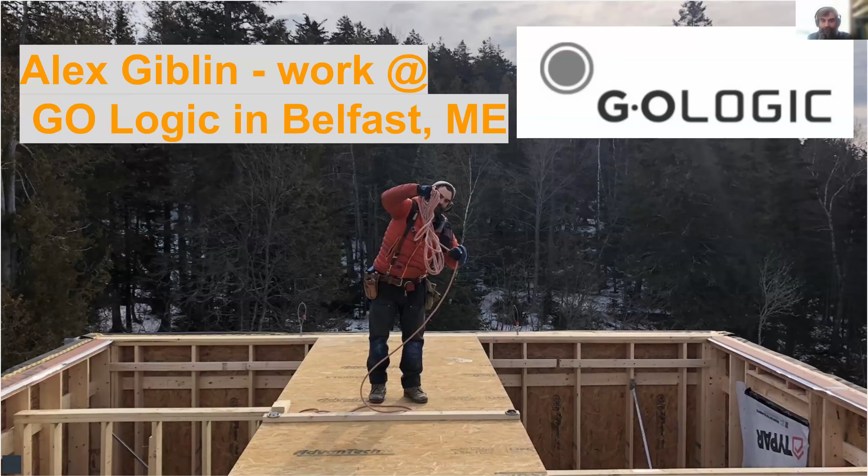I'm happy to be here today talking about DfMA, design for manufacturing and assembly. We also throw an L in there sometimes, logistics, as trucking is a key component to delivering offsite panelized construction projects. I'm going to start a little about me. I'm a carpenter, as mentioned, for a long time. I've been working at GO Logic for coming up on 4 years now. I spent the first 2 years out in the field.

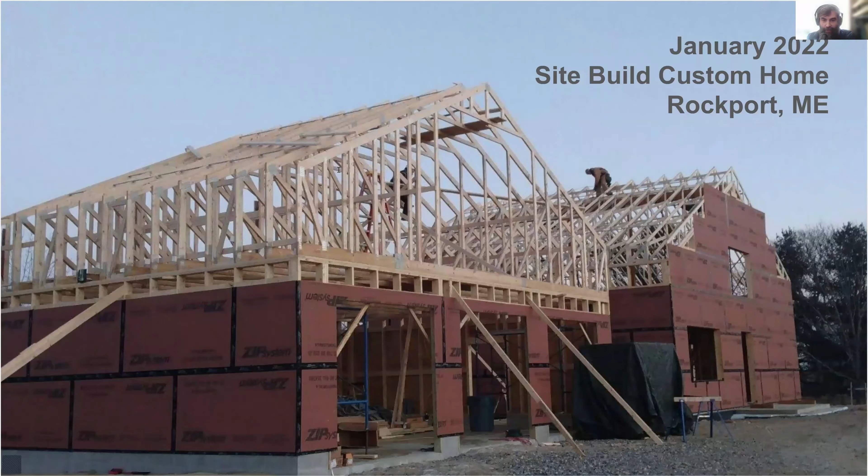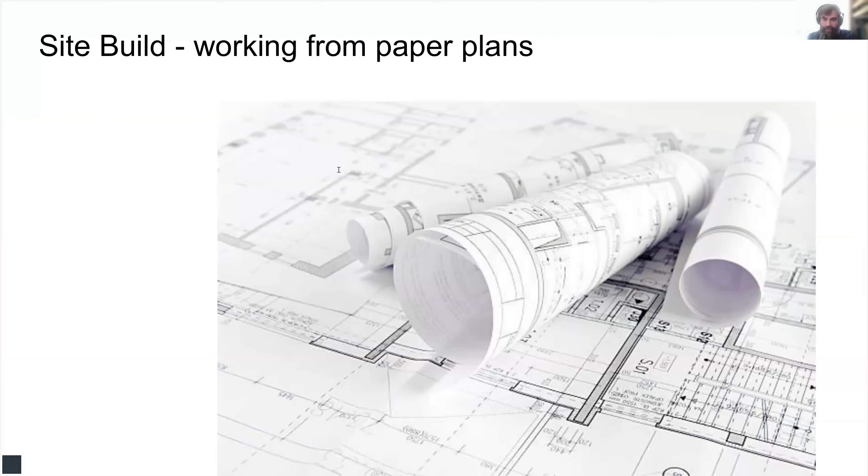So here's a couple years ago, me site building, my first build with GO Logic. I'm just going to talk a little bit about site build to set the stage for the comparison to fully modeling things in advance. Yeah, working cold outdoors. Here we are framing in January, setting trusses, windy, cold. And we're always working just from plans.

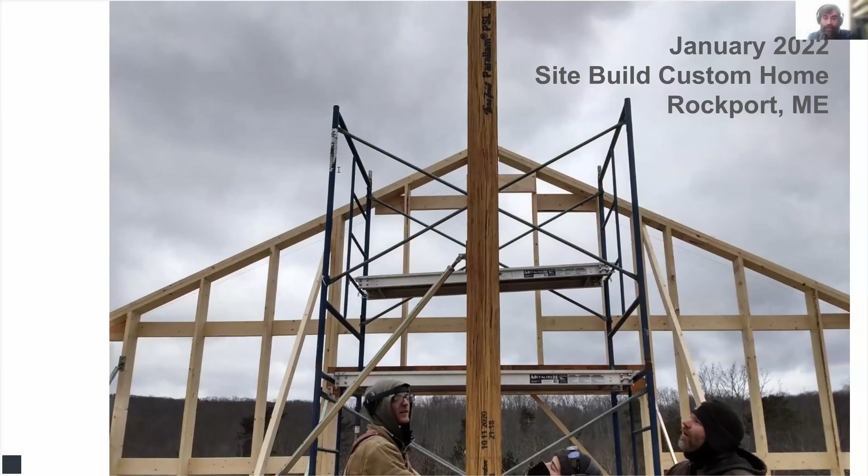This is kind of like proto DfMA for me. I always would make my own framing plans, and I would draw them out and figure out how to build things beforehand. A lot of times nobody could read them but me, but it was a good way to plan for my builds. I started doing some programming even years ago. This sort of evolved from the TI-89 calculator use in high school.

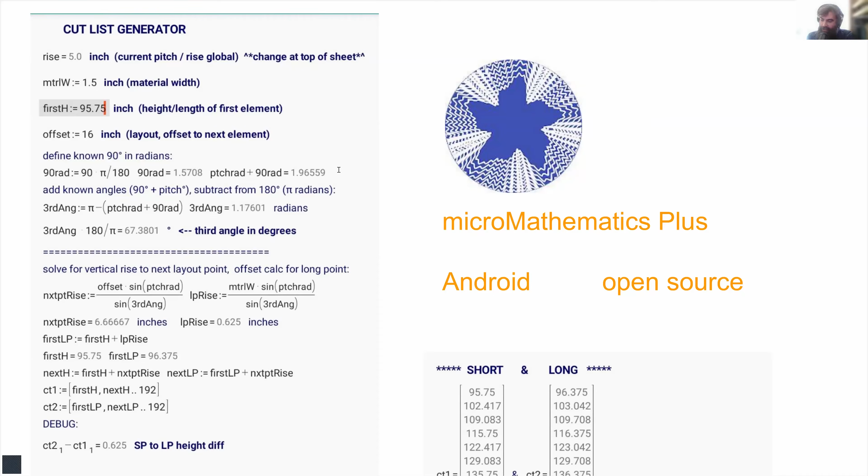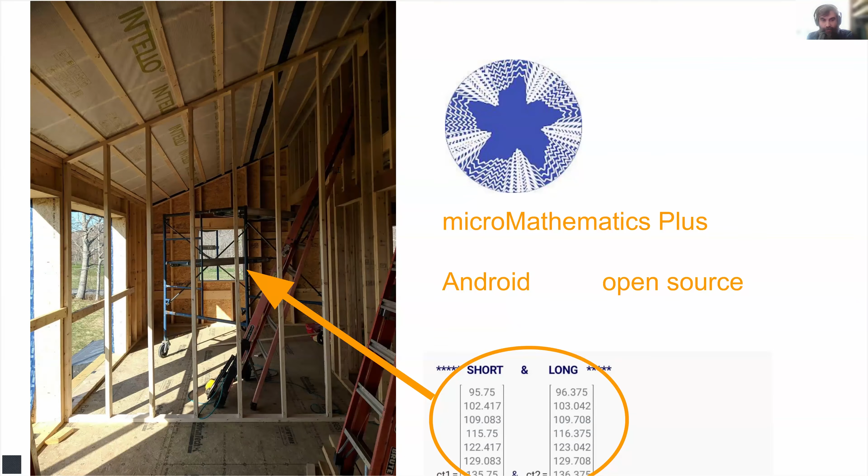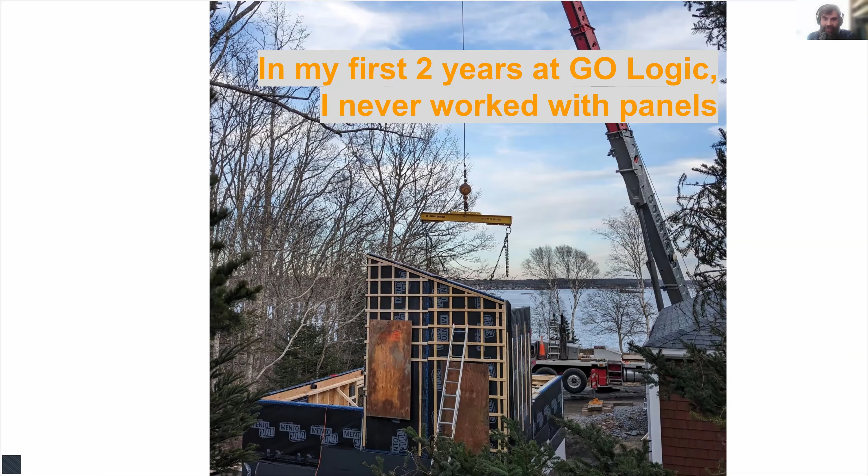So like making cut lists, I could generate things under a roof slope, studs, some framing. Again, I have the background, so I was well suited to be digging into CAD modeling and advancing these techniques. So I never built with panels in the first couple of years. I was really curious, how the heck was it done?

We have all these trailers. We're shipping buildings out of state, across state lines. We have overpasses, height requirements, and go all over New England. And there's our first parameter for constraint, right? Height and width. We have to ship these at a road legal height. We typically try to avoid oversized load designation, just to simplify on our end.

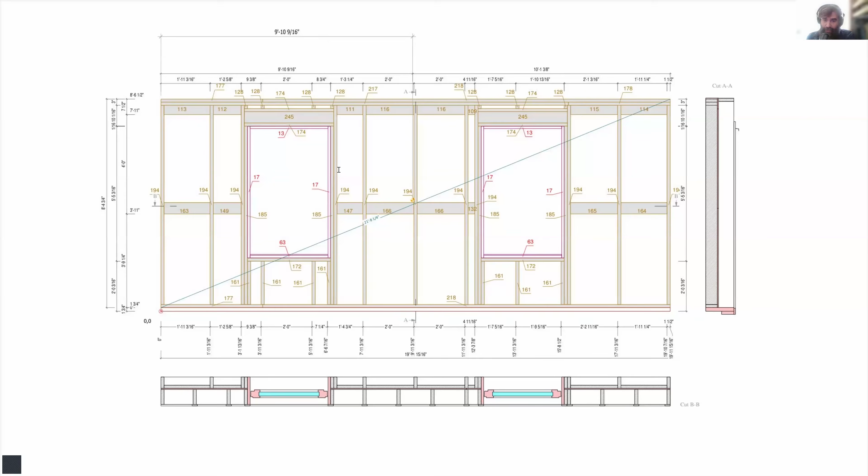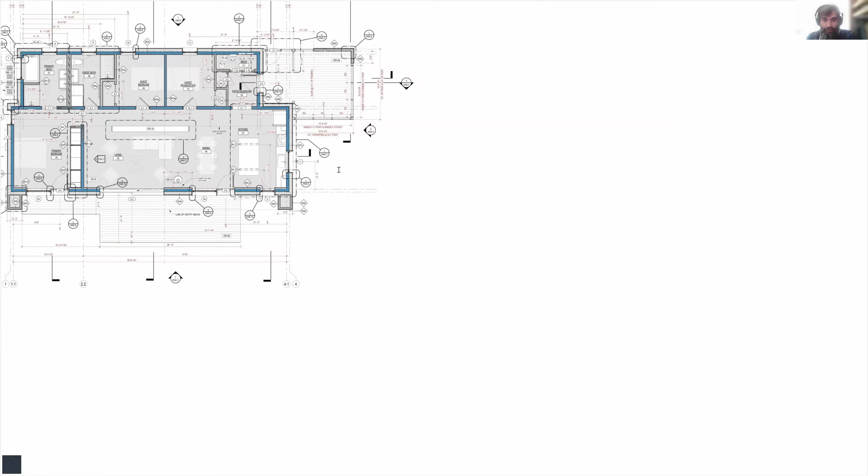So I was seeing these shop drawings that were made in the shop. Again, I was not familiar much with panelization. And we were working from the shop drawings, building panels on tables. And then there was this 3D model thing I kept seeing. I was very curious about it. How was this being done? How were we taking plans, like I was familiar with working with, and translating them to build in the shop? How was it done? I asked a lot of questions.

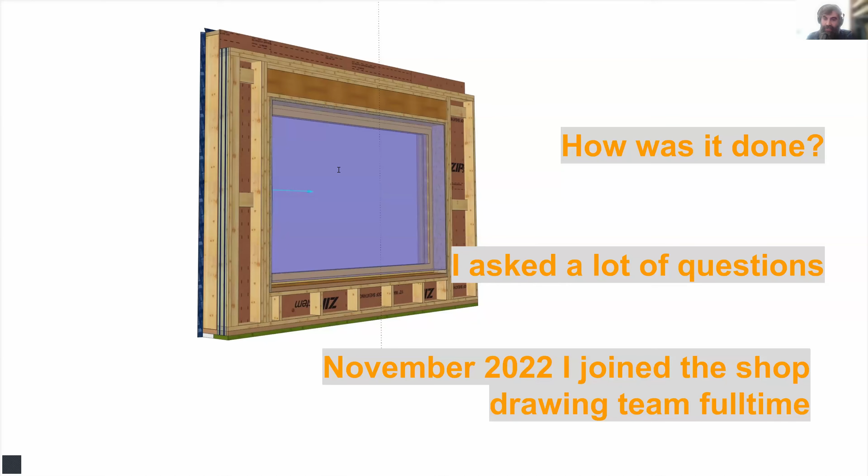The guy who is now retired, who had my job before me, was just a classic, a really good architectural technologist, been in the industry for 40 years. And he took me on as an apprentice a couple years ago after a lot of pestering. So here's what I inherited: his process, which worked well, but was not without complication, which I'll explain.

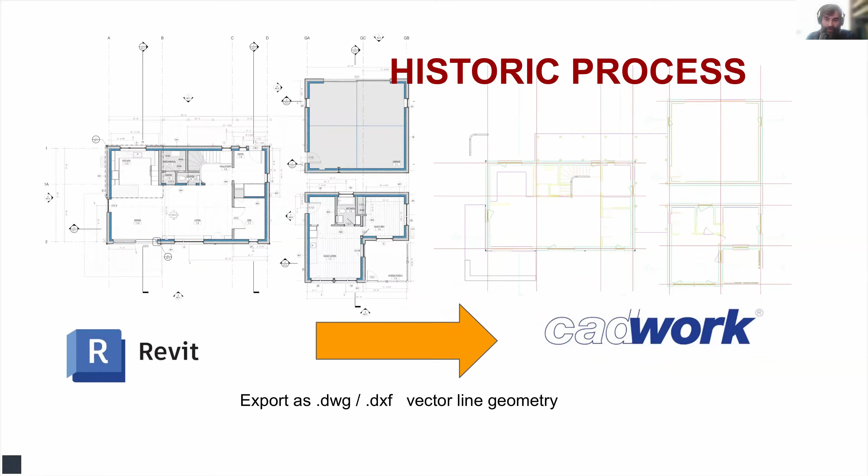We were taking the sections and exporting as DWG, DXF, vector art, and bringing them into the 3D program. We use a program called CADWork. It's a very powerful modeler, has parametric tools for discrete element framing geometry. It's a good, solid modeling program. So we bring in the successive plans, right, along the Z, and then we'd bring in all the sections, and we'd build this framework, this skeleton from the plans.

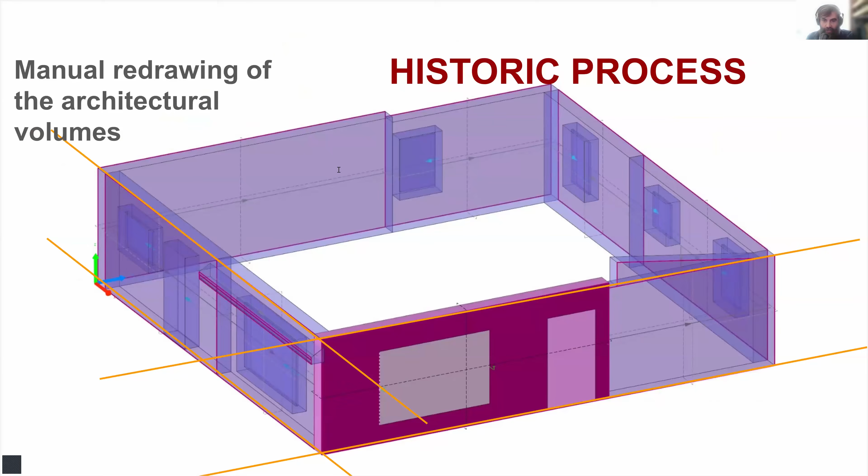And then we would create these rough volumes. And then from the rough volumes, we were able to generate walls. We're placing all the windows manually and things as per the plans and sections and elevations. And then we can parametrically generate all of the framing geometry, the entire assembly. So parametric generation, this is a really cool thing.

We use this tool called CADWork. It has its roots in Switzerland, I believe. I think it goes back to the early 80s and like watchmaking, just really technical drafting. But it's evolved for the timber industry and is used a lot in Europe and increasingly in North America. It has this thing called the element modules for parametric definitions of wall framing geometry.

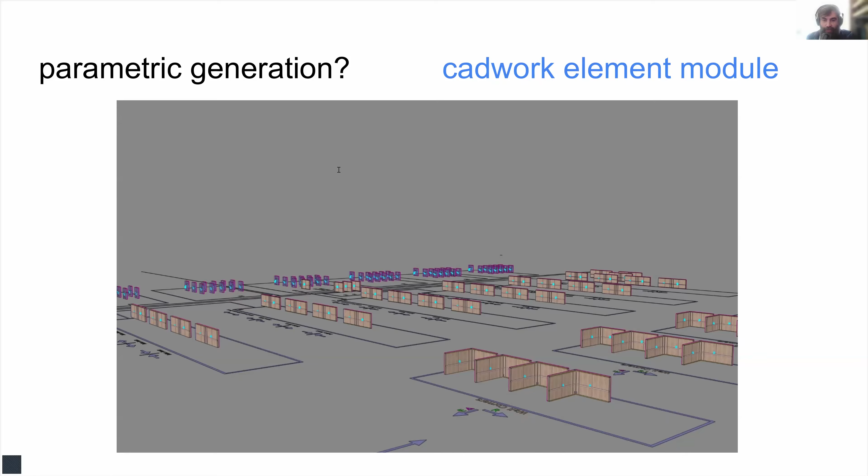So take, for example, here's a wall, and I'll just highlight a single stud here. Well, you set with this graphical user interface just through checkboxes a whole bunch of things: I want it to stretch with the top of my rough volume. I want it to distribute at a certain interval. I want it to have a cutting priority.

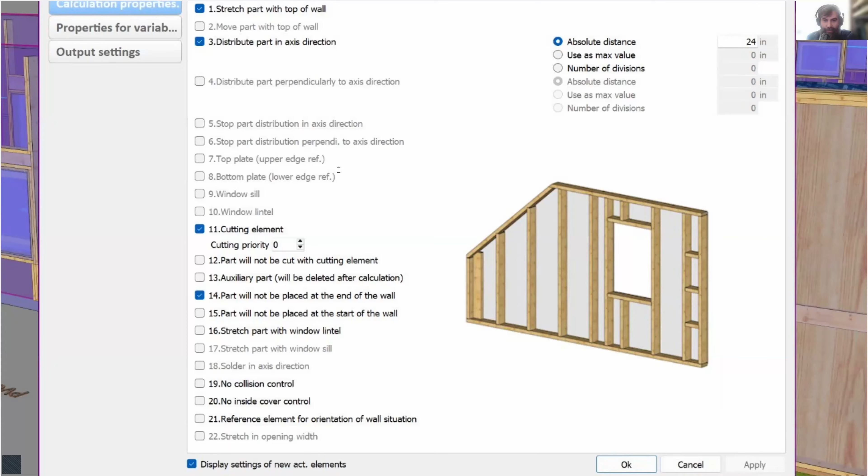I'm showing this here because I'm interested. I hope people will revisit this, take a screen grab. This is something we want to reverse engineer and make more tools like this. It's very, very cool. So we have our rough window and volume set, and we're ready for discrete element.

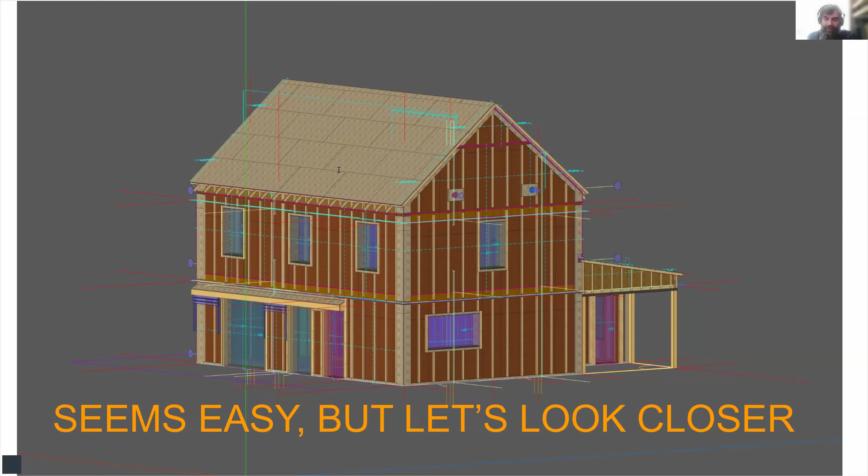I hold Alt E, run the element module, and poof, I get a whole house, just like that. Seems easy, right? There's a lot that goes into it. I'm going to talk about the historical process and some of the complications that arose, and then some improvements that I've been looking at. Okay.

So really this whole thing, design for manufacturing and assembly, the basic idea behind it all is that you identify constraints and limitations downstream of the design process, whether it be installing or shipping or ease of assembly, safety, all these things come into consideration.

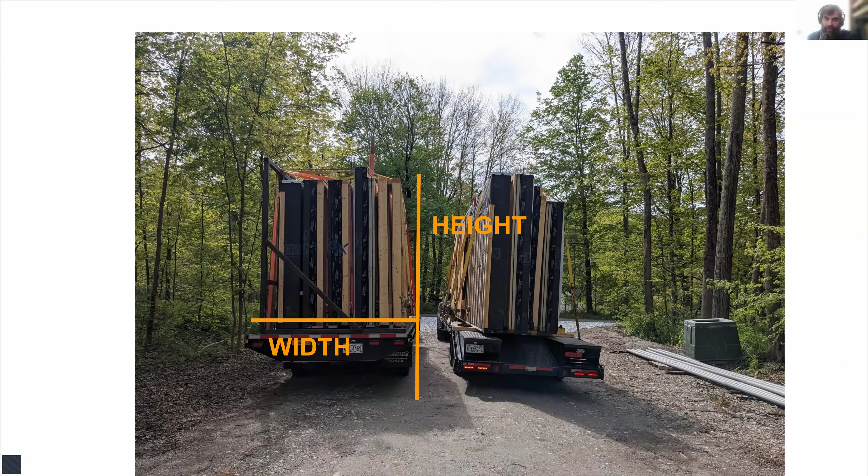So let's take, for example, shipping constraints. That informs my panel heights. I can't build a wall panel taller unless I'm going to side ship something, which increases complication. So I have a height right there that I have to conform to.

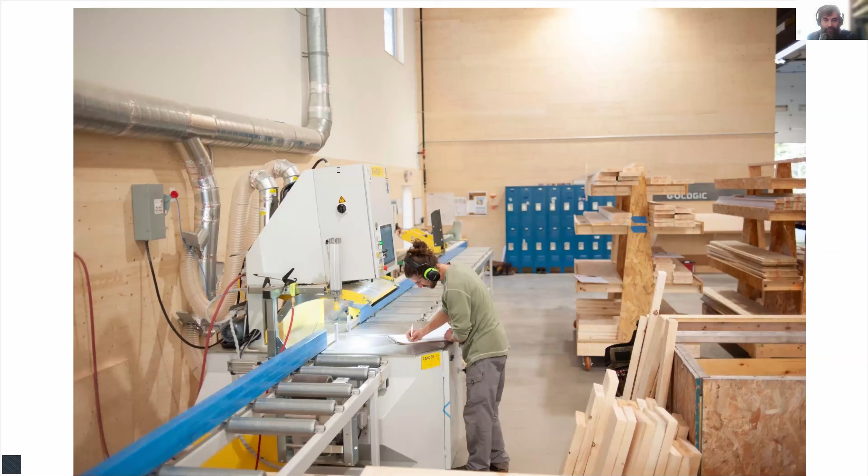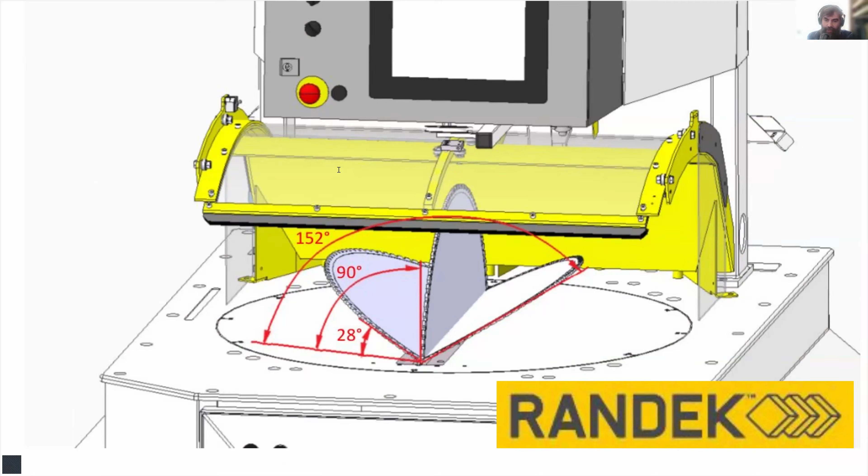We have a saw at our new facility that we got. It's a linear processor. It takes output from cadwork and produces cut files. It's essentially a CNC saw, but very primitive. It's just linearly cutting, and here's the range of motion it has. So there's a bunch of parameters that I have to work with. I don't want to be designing things that I can't cut here.

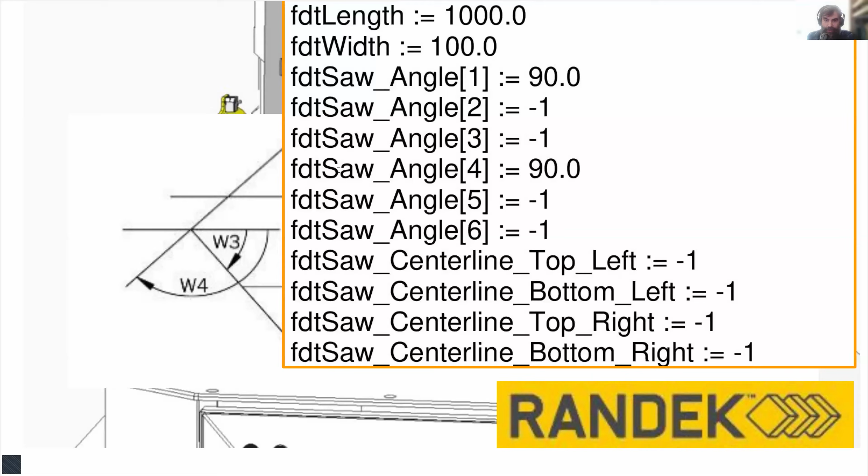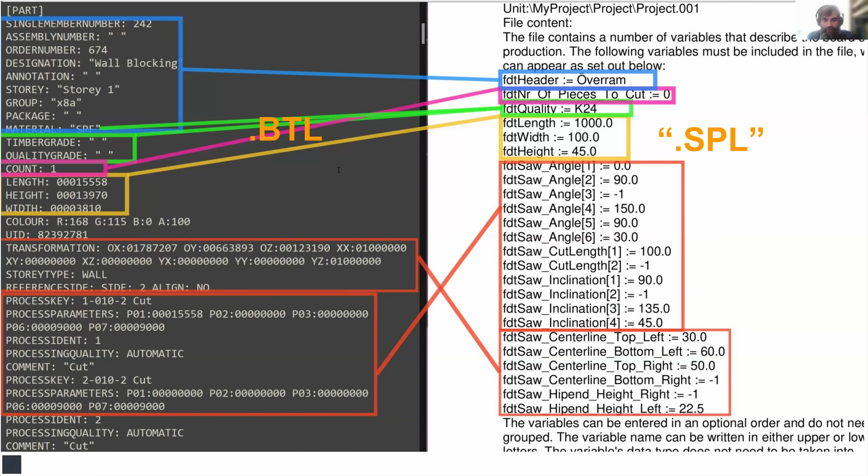Here's the simple text file that it works with. So cadwork works with the BTL file. That works with the SPL file. We figured out how to map the two and do some concatenation with different attribute variables to make that process work.

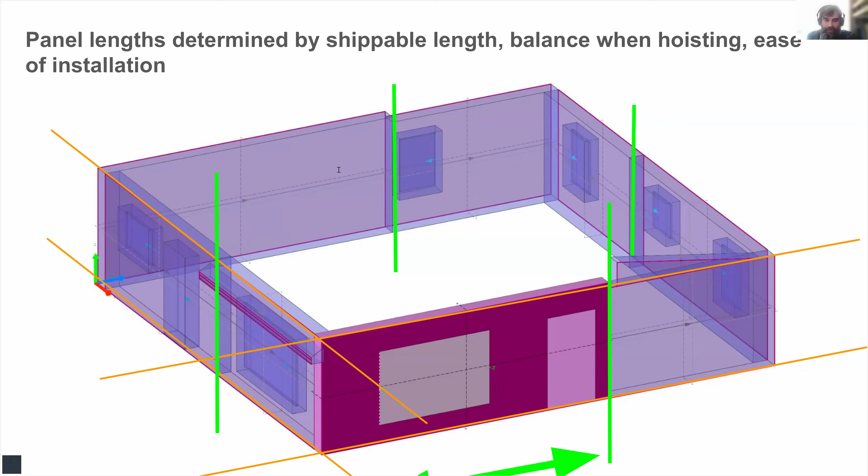Length attribute, a little off screen there, is the green lines. I have certain lengths. And I also am including balance when hoisting. That's where I'm going to make a break, ease of installation. There's a lot to consider in where to make your vertical panel breaks. So taking all these kinds of constraints, you start to schematize. That is a word I'm hot on, schema. It's so applicable. It's essentially a structured framework that you can apply.

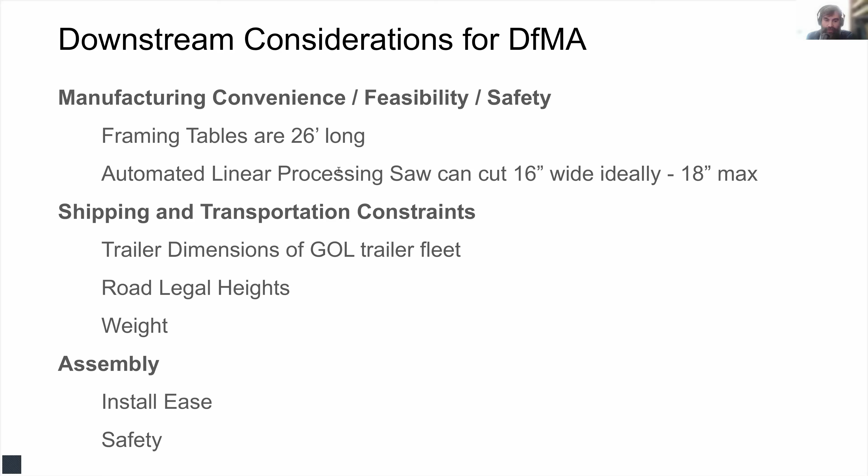There's a few other considerations. Well, I kind of went over most of these. Weight is another one I didn't talk about. Safety. These are all priorities that we are considering as we refine our constraints upstream in the design process. So one of the first things I started doing is making some rough guidelines on what our parameters are for panelization. So designers, whether in-house or outside architect, we do a lot of custom work with outside architects, we have to get them to abide by our parameters.

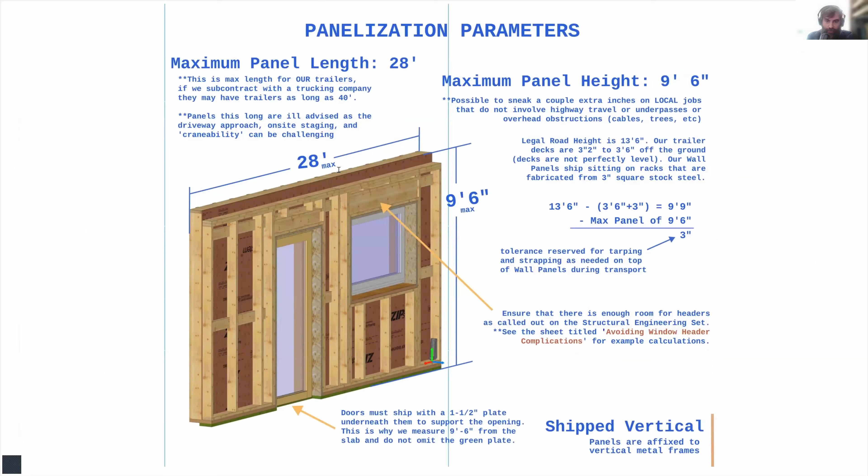There's floor and roof. These are flat stacked. So walls are shipping vertically, one against the other, on a rack. And then we can stack our floor and roof panels 5, 6 high.

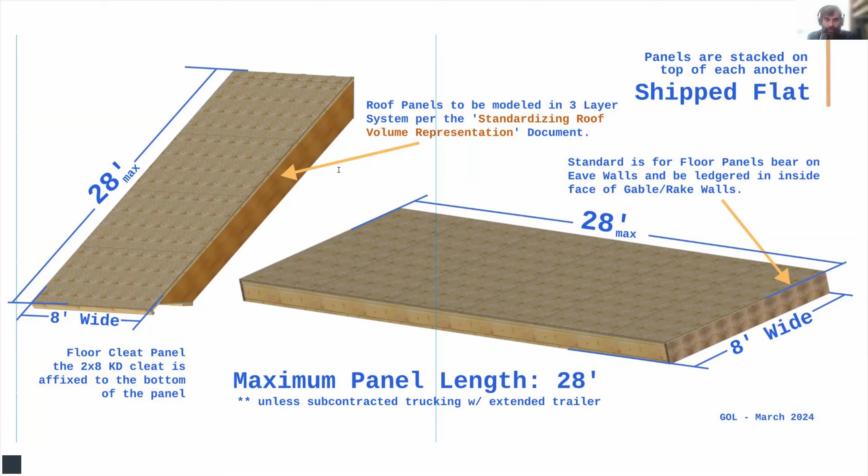So let's revisit the historic process where we're bringing in all the sections and views. Now, I'm just going to get into the weeds a little here. This is specific to Revit, although I think it has implications for other softwares for producing construction documents. I'm not promoting Revit's use. It's just what I have familiarity with. There's a lot of problems with it too.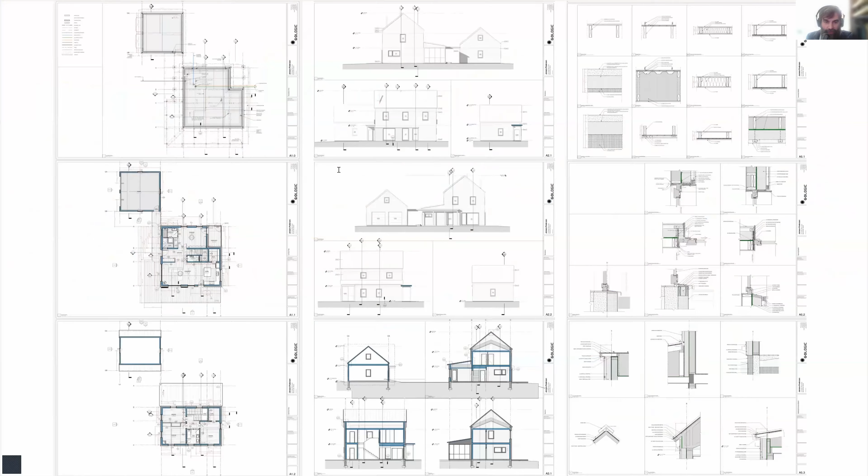So anyways, all these sections and things in a plan, in Revit, there's a 3D model of it. So we already had a 3D representation in Revit, right? There's a rendering of it. In a plan set, if it's produced by Revit, this is the working methodology. Plan views and elevations and sections are actually slices of a 3D model.

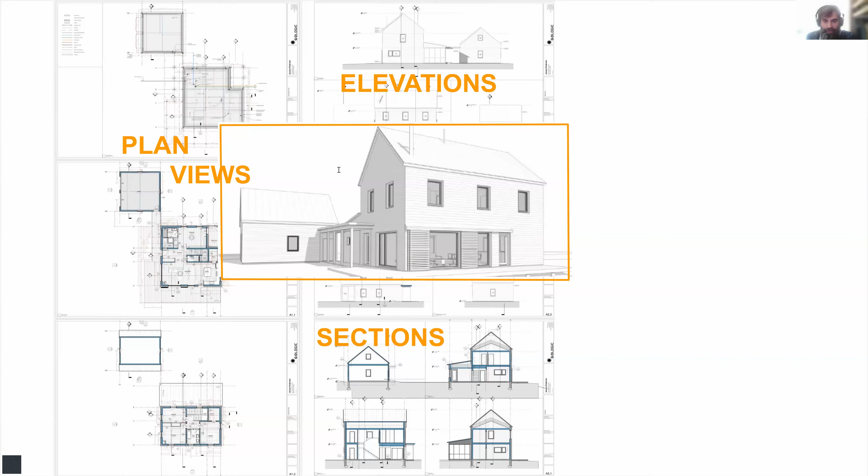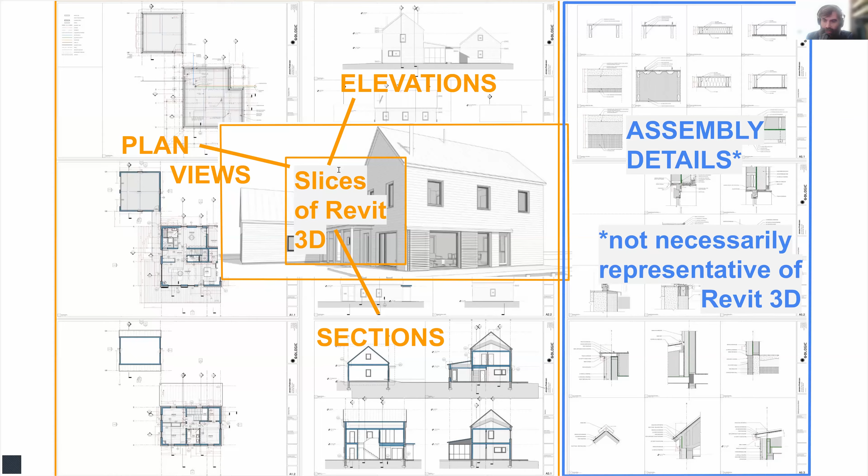When you get into assembly details, it doesn't necessarily represent 3D. This is something always mysterious to me from a builder perspective that I'm sharing here with other builders, because your sections are going to be slices, but those assembly details where they don't work out, there's a good reason. They aren't necessarily informed by the geometry in the sections.

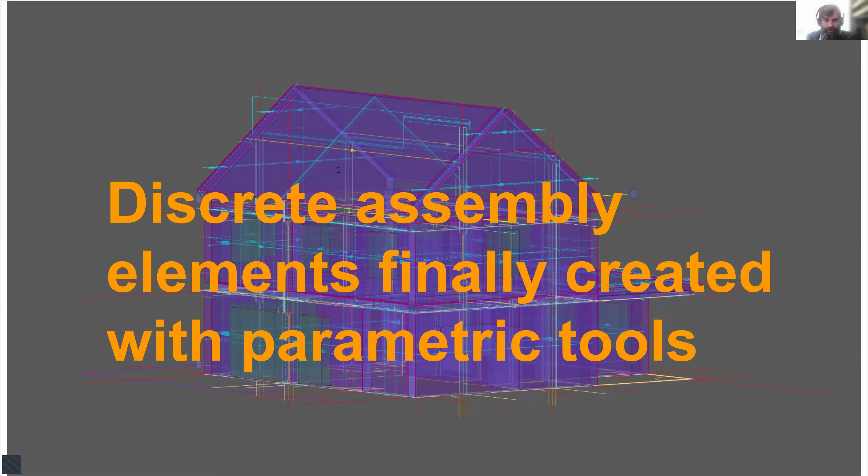Okay, so we're importing our slices, our plan views. We're bringing in our sections. And this is the old process now. We're placing windows in manually, right? So all the walls and windows, then finally the parametric tools. I generate the building. Takes a lot of work to get there. I had to dig through the window schedules. I had to cross-reference window mark numbers, reconcile with structural callouts.

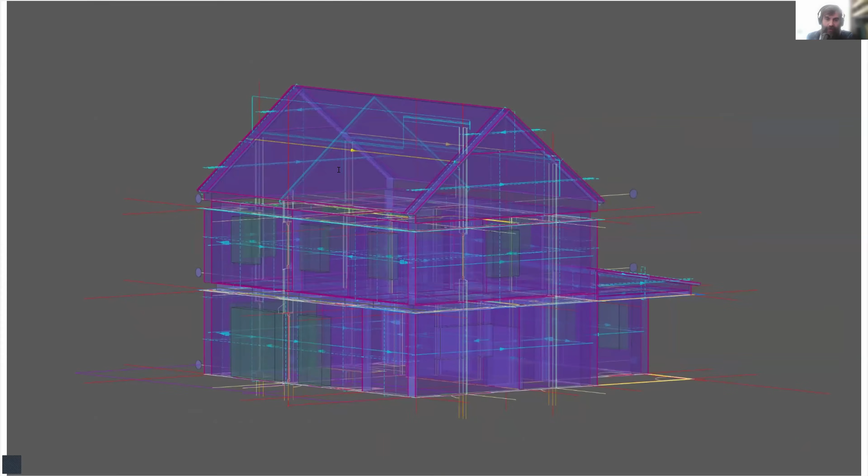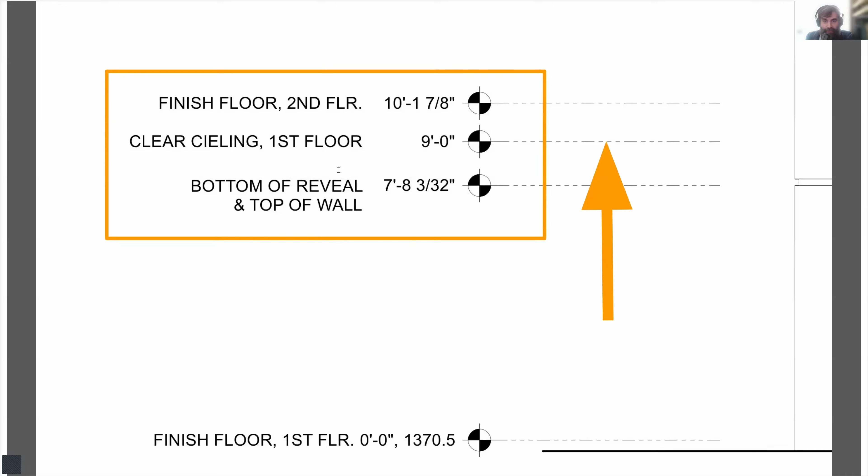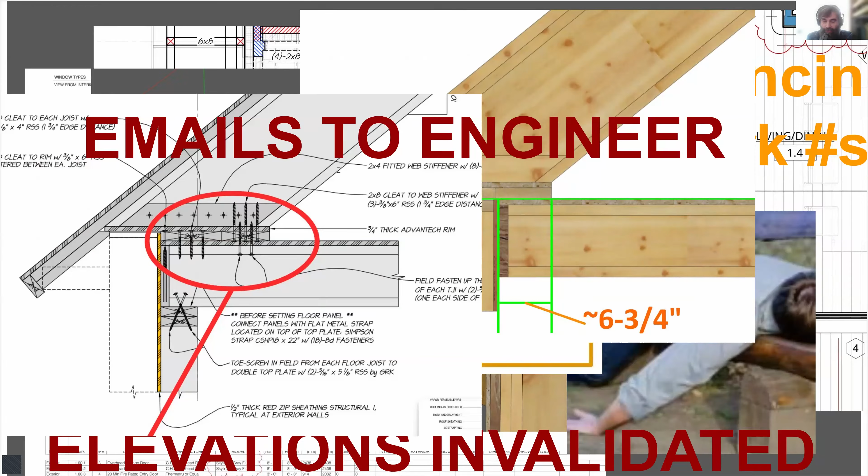By the time you're getting into the weeds here, you fire something off to generate, and a header doesn't fit, and you have to undo. You go backwards. You adjust the rough volumes. Now I'm raising my panel height, or my L2 subfloor height. So now my elevations and my callouts on the plan section are invalidated. This is a common problem and very frustrating. You're finding other things where the geometry doesn't match the architecture or the structural. Especially the geometry not matching structural conditions is very, very common.

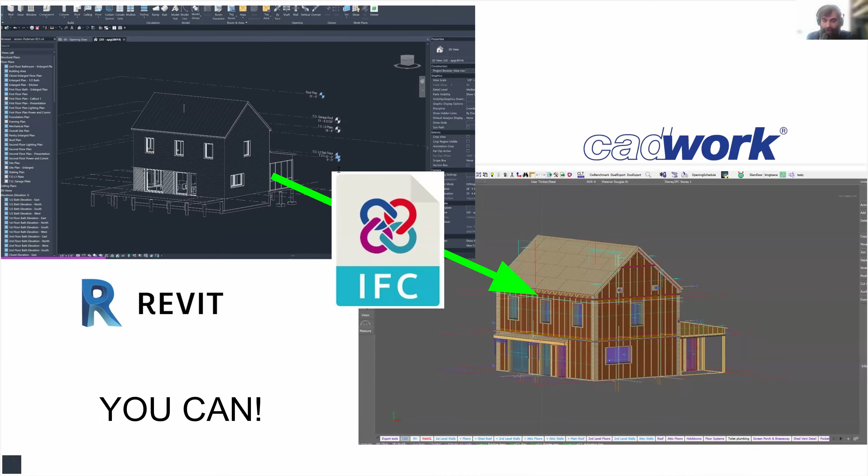So yeah, this is just to emphasize the frustrations involved in dealing with this stuff. And there's got to be a better way. So let's rethink it. We had that 3D model in Revit. If I could get the 3D from Revit to CADWork, there is a file format called Industry Foundation Classes, or IFC. You can import with IFC.

It's an incredibly robust and interoperable schema that we have. I'm going to talk about it here for a bit, and I think we should all be looking at it more closely as an industry. Industry Foundation Classes. It's an interoperable standard for architecture, engineering, construction. It's been around since the mid-90s, and it's actually a consortium led by Autodesk.

They formed this body, buildingSMART International, and they said, we've got a problem here. We've got all these softwares that are data siloed. Nothing's talking to one another. People are manually redrawing things or copying attribution data from one program to another. So they developed a standardization, a schema, an interoperable data standard called Industry Foundation Classes. It evolved from exchange file semantic models.

It made it into an ISO standard in 2013, and it's still being updated all the time. In the past few years, it's seen a lot of expansion into defining bridges and roadways. It's being used in billion-dollar engineering projects in Asia and throughout Europe.

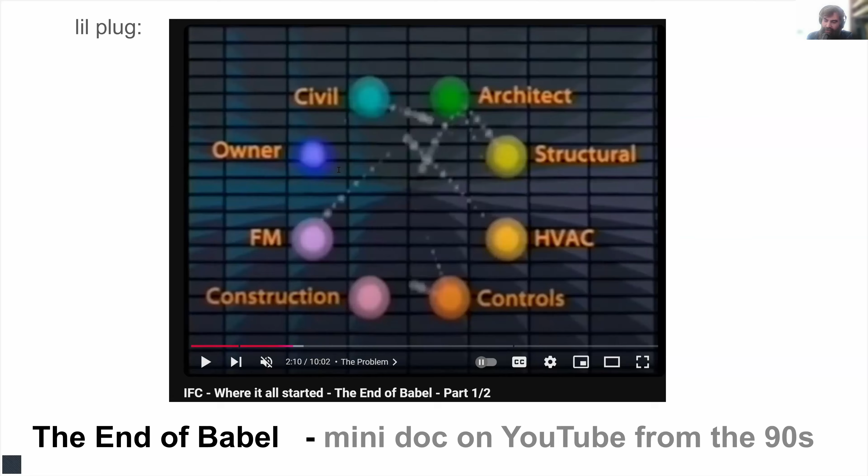United States as well. Here's a plug for a little documentary if anyone's interested in this. It's a very interesting history. It's called The End of Babel. Just look it up on YouTube. It was produced in the 90s, around the time that the original IFC schema launched. It has one of the BBC guys narrating, James something, I can't remember his name. It's really great.

IFC. Why again the open and interoperable standard? I'm just going to talk about that for a minute. This format allows us to exchange data without restrictions imposed by proprietary formats. Again, it's an interoperable standard, and it has a lot of compatibility with all the big players in AEC software. So it lets you use the tools you want, and you can export it and then import it into another format.

It's software agnostic. It's an interoperable standard that we have, and it's for geometry. Sorry if I didn't really reiterate that much, but it is for geometry as well as attribution. I'm going to talk here quickly about what it is. It's actually just a text file. It can be very long. It can be hundreds of thousands of lines, easy.

Each line is in the STEP format, Standard for the Exchange of Product data, I think. Each line has a unique ID, a number at the beginning, and it basically builds relationships between the different line entries. It supports all kinds of geometries, solid modeling, splines, meshes, tessellated. You can do point clouds and things, and it has rich attribution data.

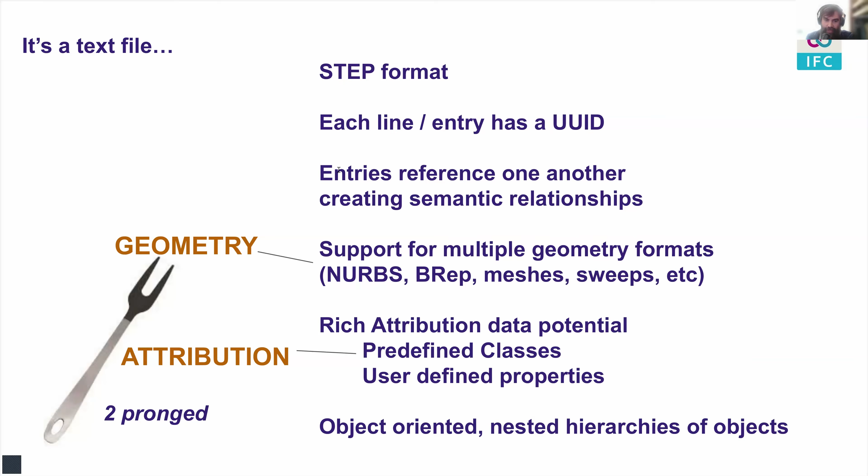And that's one thing I want to talk to you about. Getting back to BIM and DfMA, this is really a two-pronged approach, is how I've been explaining it to people: geometry and attribution, the two together. An analogy for you, something I've been honing in on. With websites, if you hit Control U in any web browser, you get a view of the HTML source that schematically describes the web page as it's rendered.

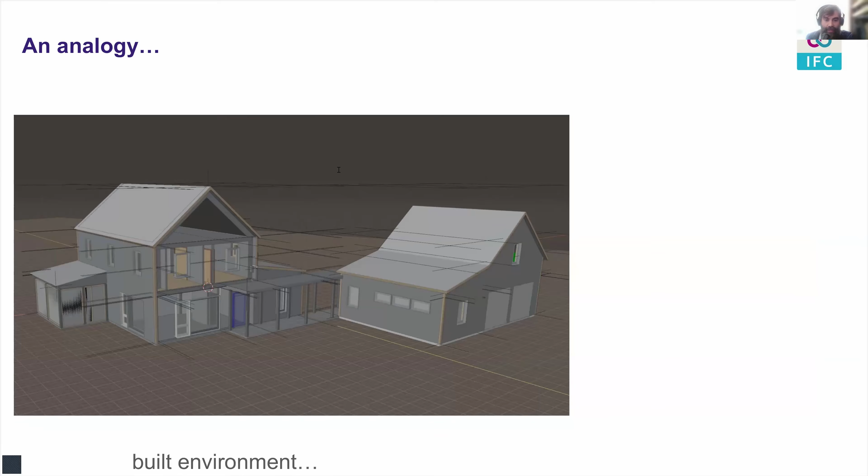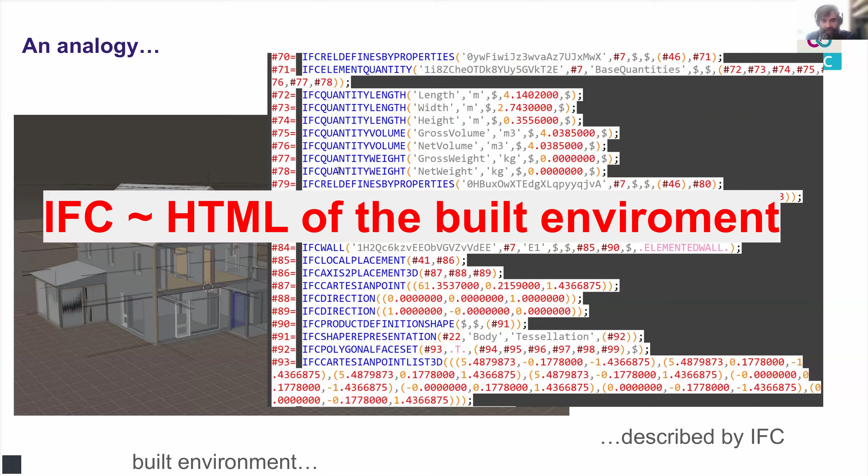In looking at IFC data, what we have is a source code for the built environment. So yes, it's like an HTML or a source code of the built environment. That's how I'm trying to explain it to people.

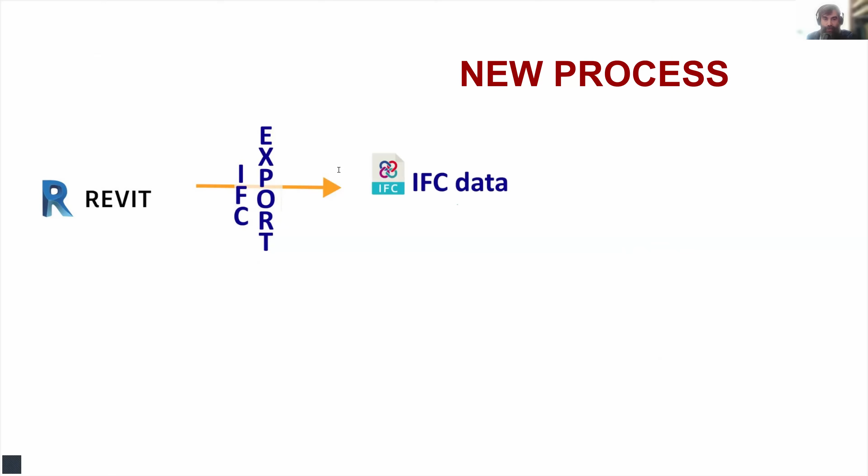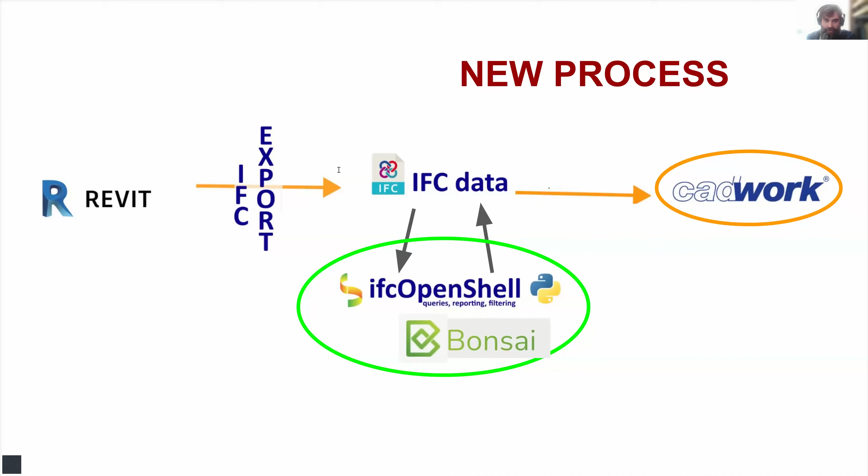Here's our new process, where we're using Revit currently with the designers in-house. So we're exporting IFC. I take the IFC data. I can manipulate it with a library called IfcOpenShell and a tool that was called BlenderBIM, now called Bonsai, and then into CADWork. And I have an exact representation of the data that the plan set was created from.

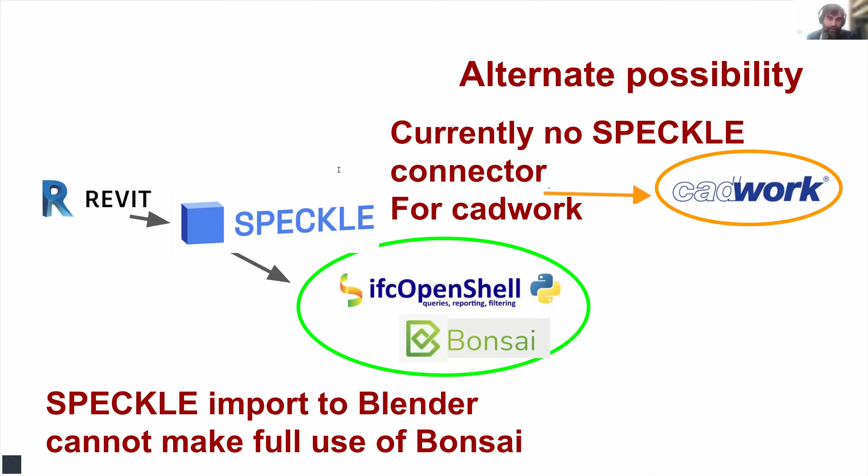Here's an alternate I'm interested in, this thing called Speckle. I don't know if anyone's using Speckle connectors in their workflows, but it's worth investigating. I can't use it with CADWork, which doesn't have compatibility, but I'm able to use it between Revit and Bonsai, which I'll talk about in a minute here. Yes, Bonsai, IfcOpenShell.

Bonsai is free, as in freedom. Anyone can download it for free, but also use it for any purpose, modify it, redistribute it in any way they want. And it's native IFC authoring. So instead of working siloed in Revit and then converting and exporting to IFC, you're literally working directly in the IFC file. It's very, very cool. It's built on top of IfcOpenShell. I know I'm getting technical here, but it is worth explaining.

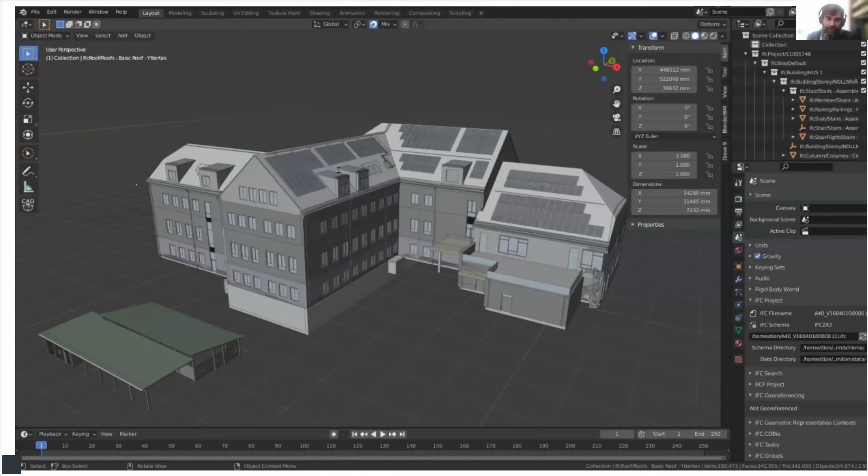This is a great community I hope everyone who's interested will check out: the open source Arch community, osarch.org. They have a discussion forum and a great wiki. Good place to start. Here's a look at Bonsai, BlenderBIM, looking directly at IFC data.

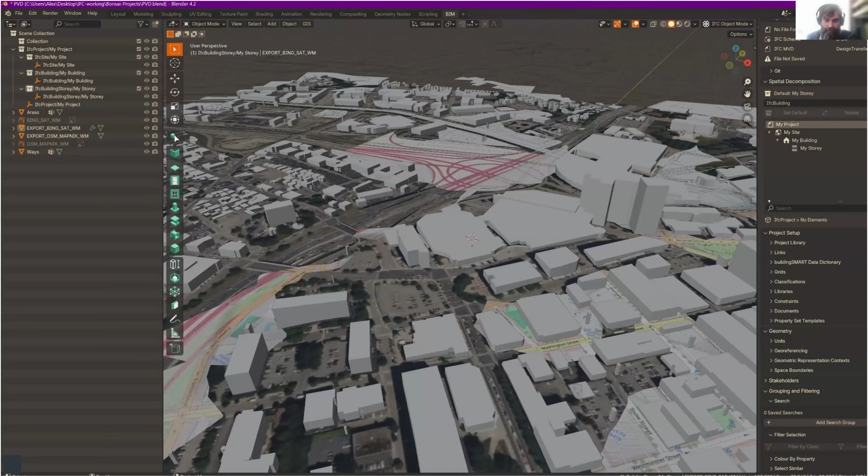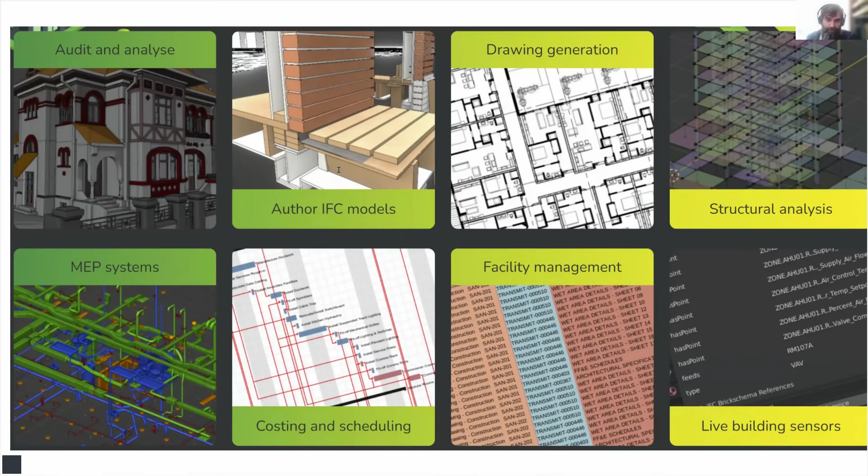And again, with the attribution, you can get into things like scheduling and cost takeoffs, and it has some great GIS tools for importing OpenStreetMap or Bing Maps satellite data. Facilities management, drawings are coming. It's a work in progress, but there's a lot of possibilities with the software. So it sounds great. I'm selling it really hard. IFC as an interoperable exchange, and I went so far as designing the whole business workflow around it, like, this is going to change everything.

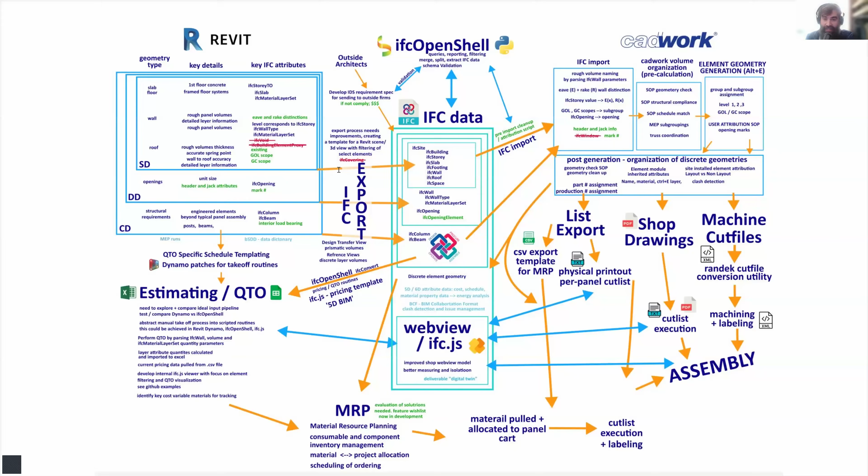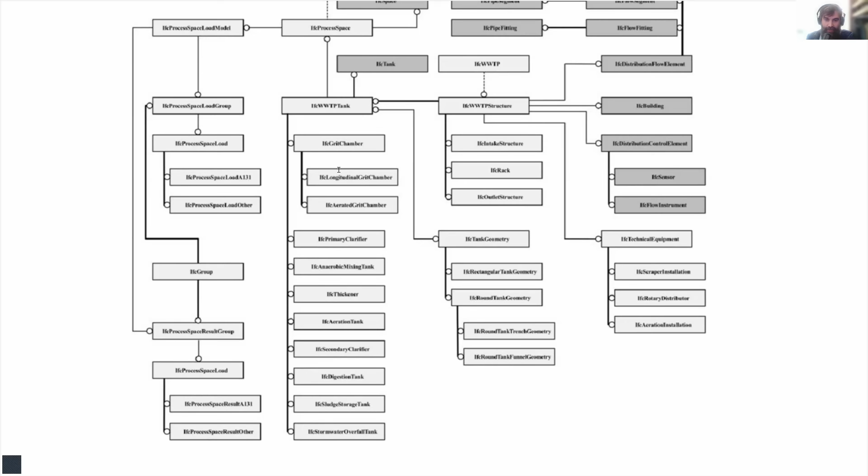Well, let me tell you, in practice, it's pretty tough to use. It's a very confusing, dense schema. In trying to make improvements to our process using it, it's been a very hard battle. But if you keep it simple, again, the two-pronged approach, geometry and attribution. Let's talk geometry. So geometry targets.

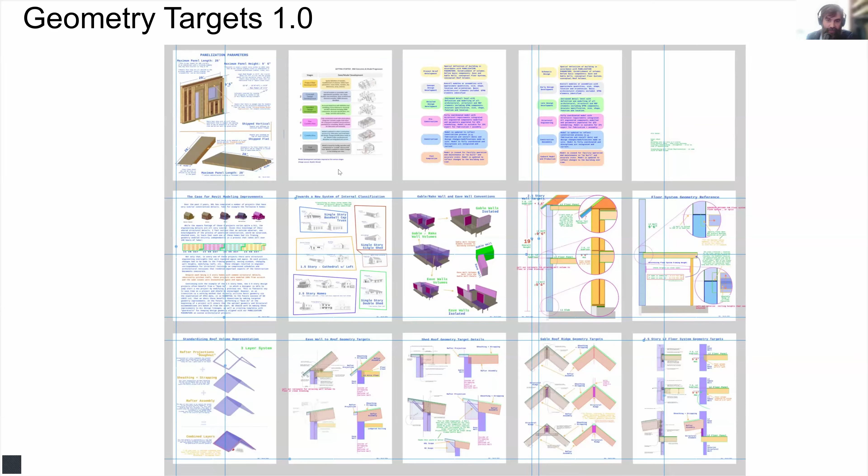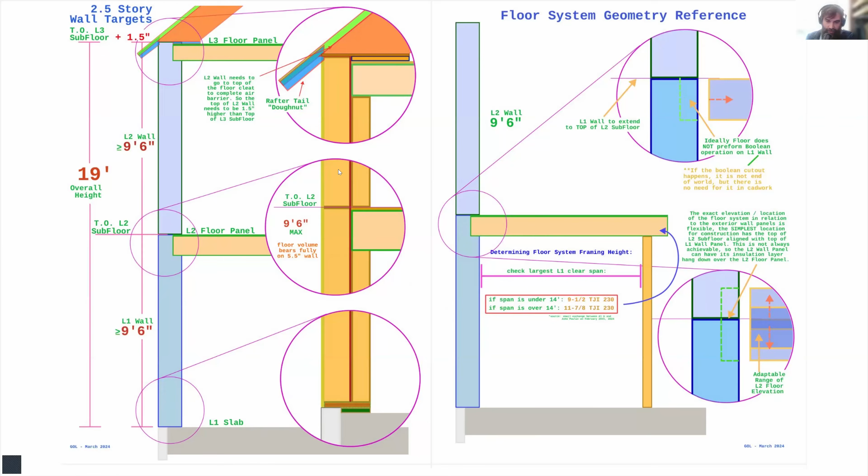I created for our company internally a big packet full of geometry reference images. Again, I'm not producing the CADWork model from the plan set anymore. So if they model in accordance to my geometry targets, I can just import the rough volumes for the panels they've created. So honing in on things like floor to wall and wall to floor to roof intersections, giving them guidelines that they can design to and always conform to, greatly reduces the complications downstream in producing the panelization plan. So standardizing conditions.

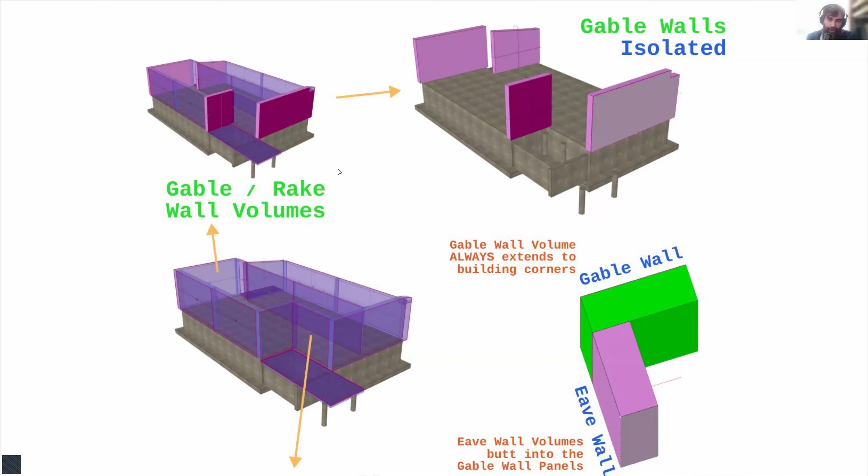We took the gable wall. We said any gable wall where we have our air barrier detail wrapping, we use a gasket on the end of our eave wall panel, will turn the corner. So we say gables go all the way every time. So every gable panel, you can see here, the eave wall is always butting to the gable. Always. And just standardizing things like that.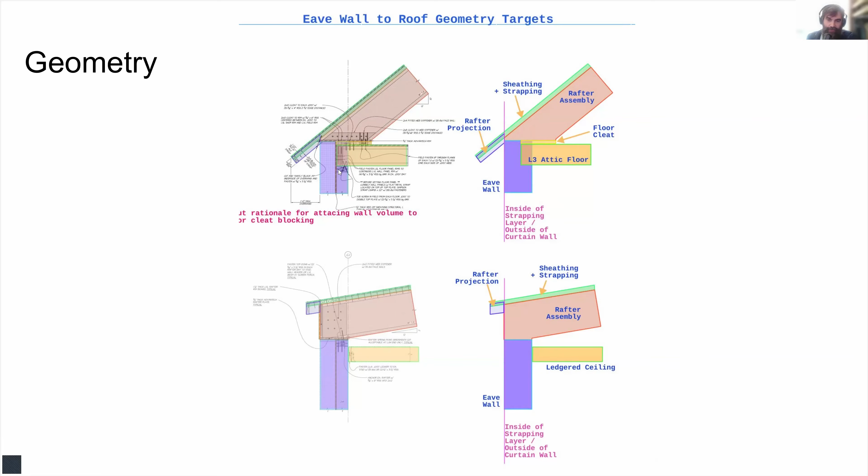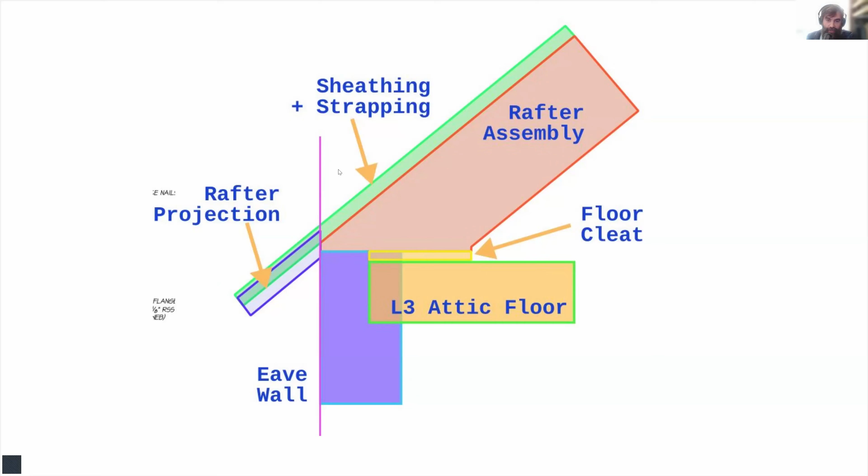Here's some of our roof connection details. I take the structural and I abstract it into just the rough volumes that we need modeled properly. And it gets you to: if we model just like this in the design process, when I get to do my generation, it's going to be a home run. There will be no surprises. It takes some work from the designers.

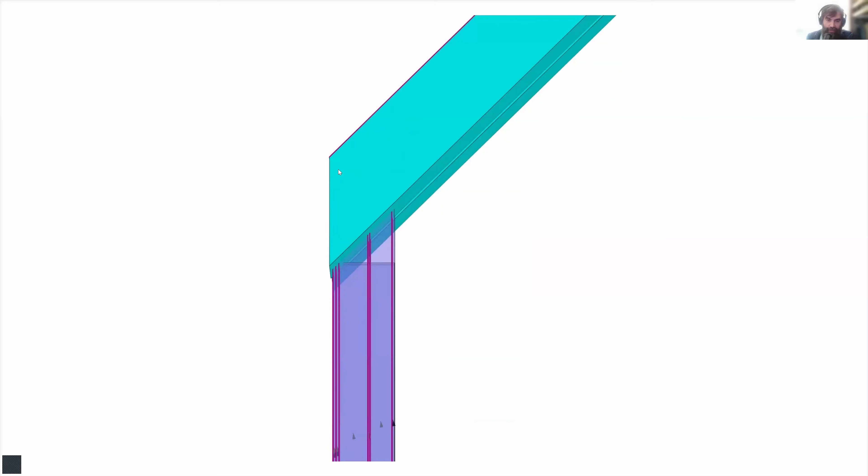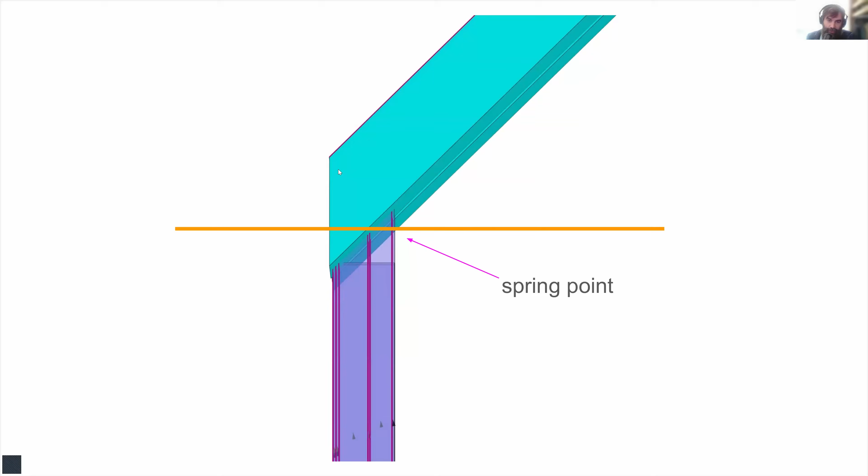In Revit families, and I imagine similar in other software, there are different kinds of complications. Revit wants to just glue things, a wall to the bottom of a roof, like this here, for instance. That doesn't work well for what we want. I need to identify the spring point. Spring points are very important in modeling accurately. So that's an example. I want the break right there. So that was what it used to be. This is how we're modeling it now.

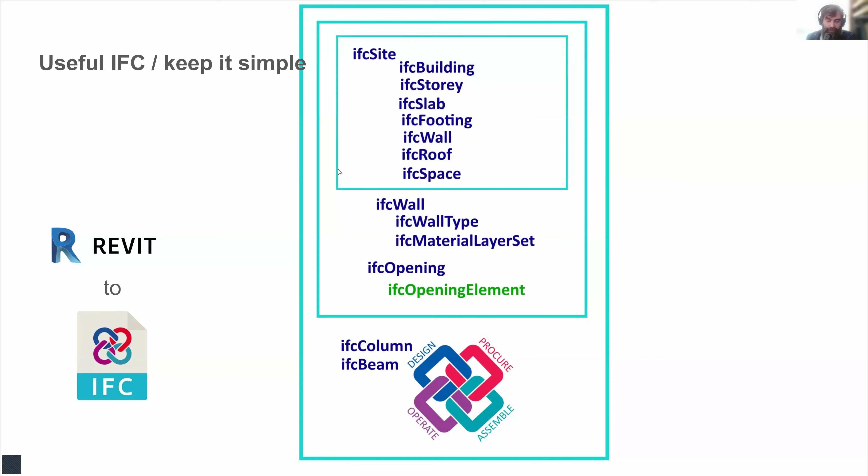So this is a slide I pulled from a talk by Helena Lidelöw on prefab housing factories in Sweden. And I've annotated it with Revit, CADWork, shop build. I like this slide because it's depicting, as we move from left to right, the various stages: Revit, CADWork, shop build, site install. It's the project knowledge and the digital information. You can see that sawtoothing.

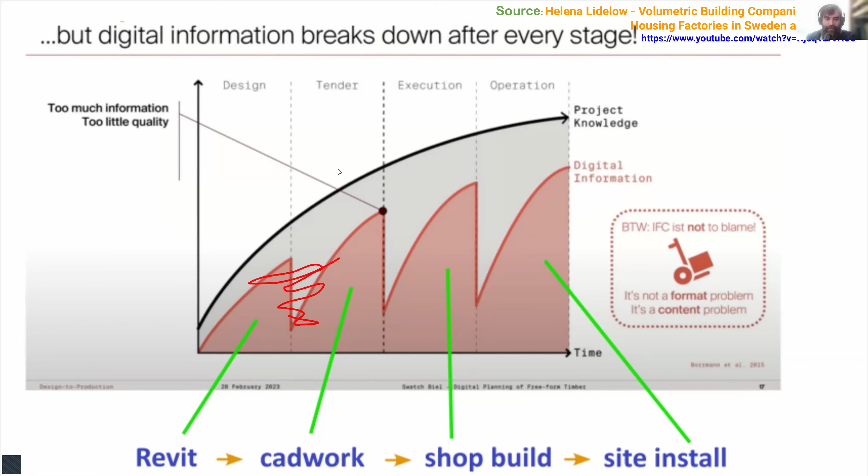It drops off. This is very, very common in our industry, where people are manually redrawing things or copying info from one program into another. And if we can eliminate these humps here with BIM data and IFC, I think we'll have a lot of ground to gain there.